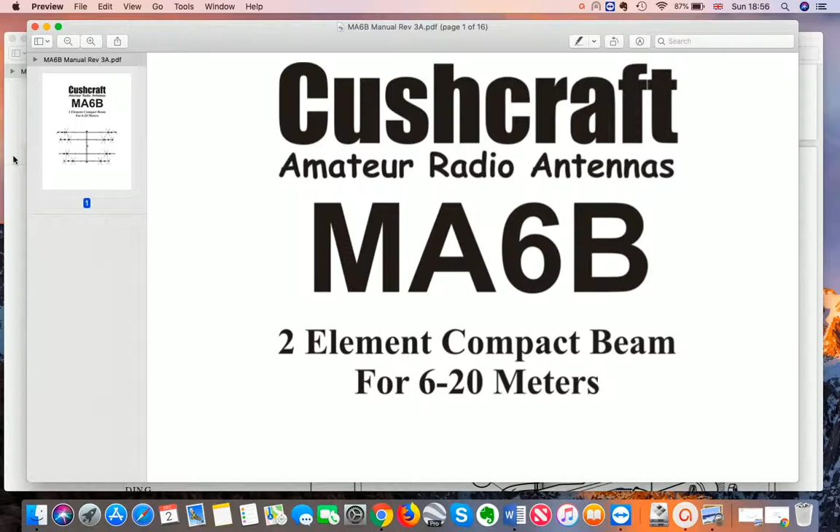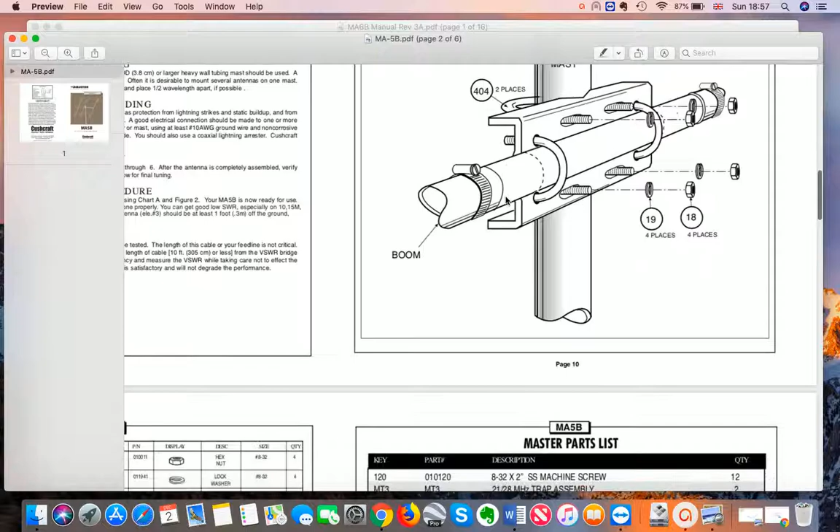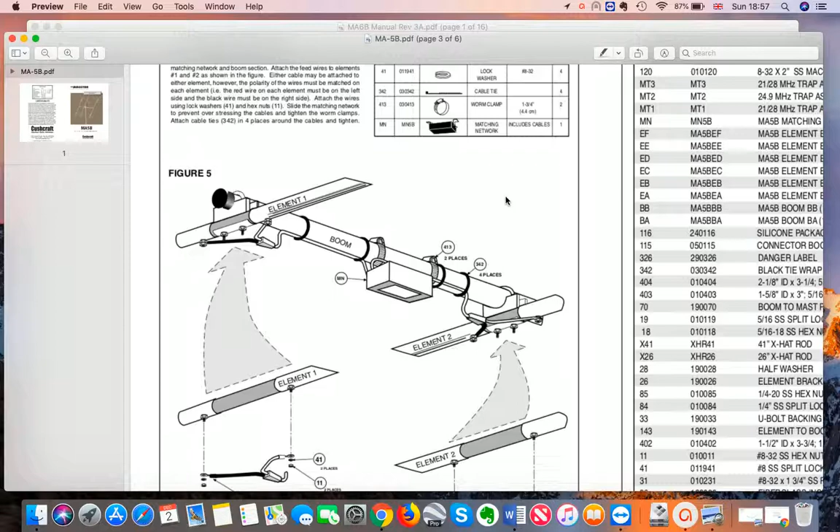First thing I would suggest is that before you start building the MA6B, have a look at the MA5B manual, because it's much better written. As you can see, you get full information with a full diagram on how to fix the mast to the boom. If you've done this kind of thing before, it should be no problem to you, but in my case, it was the first time I'd done it myself, and I was very grateful for these tips. This is also how to fix the elements to the boom, etc. And I personally found it very useful.

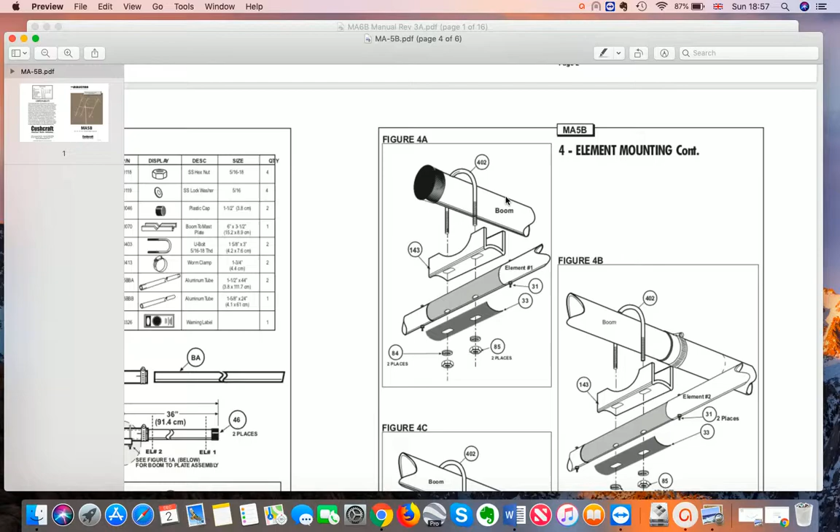For example, here with the element mounting, you see how the parts fit together. And if you have experience, I'm sure this is obvious to you. It wasn't obvious to me, and I was very grateful for this extra information. You will also see when it gets down to the X hat assembly that they also tell you how to affix the X hats to the elements as well, which, as I say, I personally found very useful.

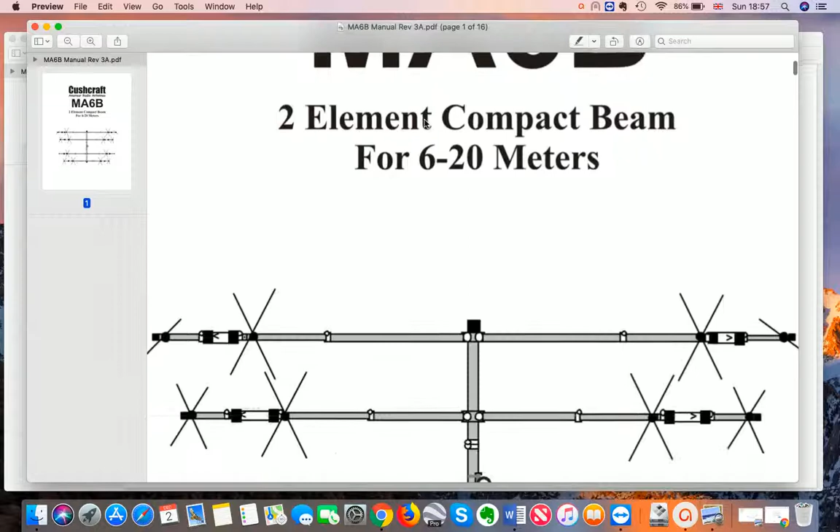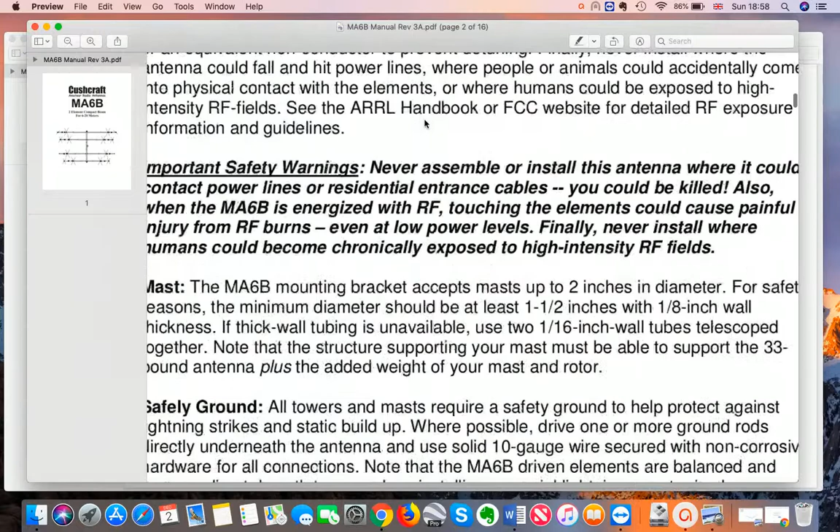To go back to the MA6B manual, you'll find it looks very good there. That's how the antenna is going to look when it's all put together. And you start off with a parts list, which is more or less correct. Just an aside here, we in Britain know worm clamps as hose clamps, and that's just the American expression for them, worm clamps. Maybe people use that in Britain as well. I wasn't familiar with that.

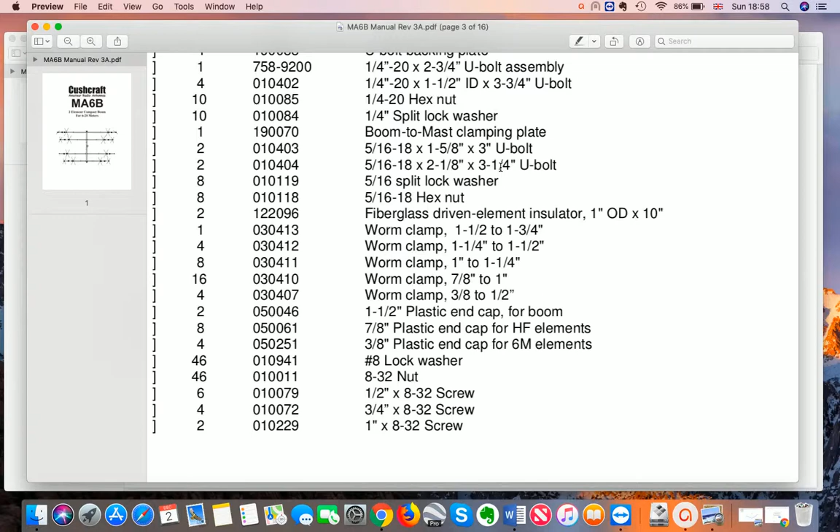And it's a good idea to go through all the parts and find out, make sure everything is there before you start working on it. What I did was, with the tubes, I measured them and put a tape on them with the name of the element or the tube, so that when I was putting them together, I could just go over and pick up the correct one from the instructions.

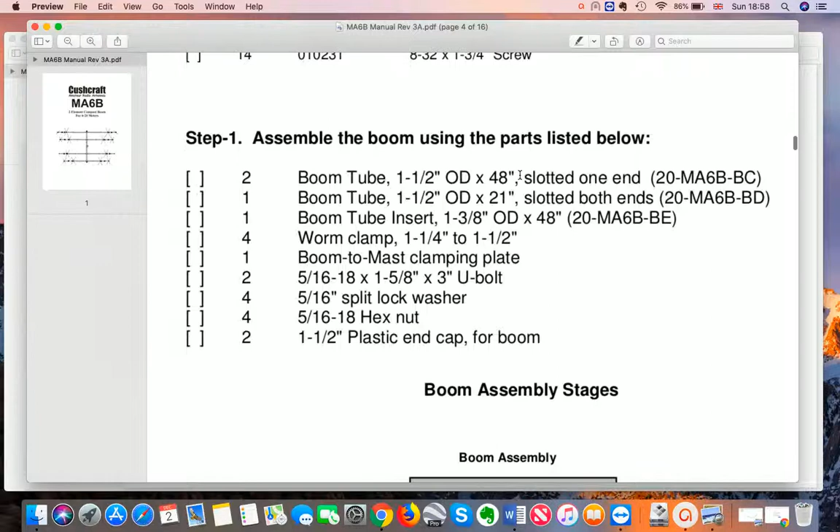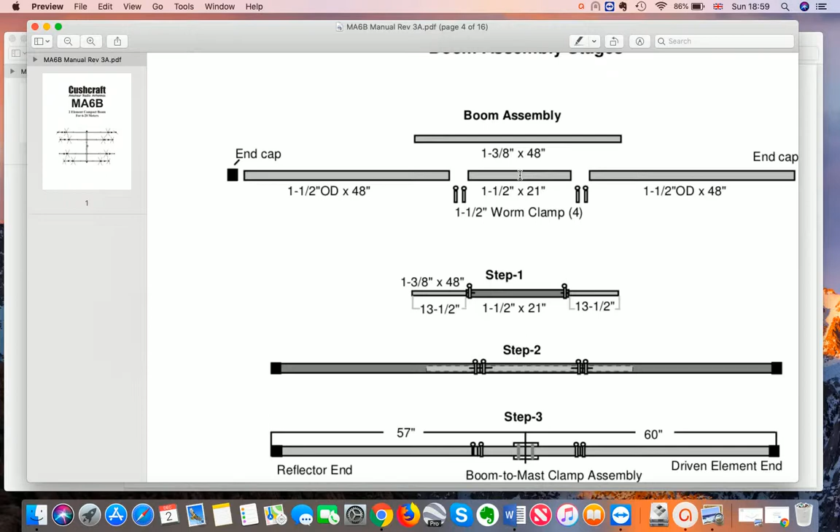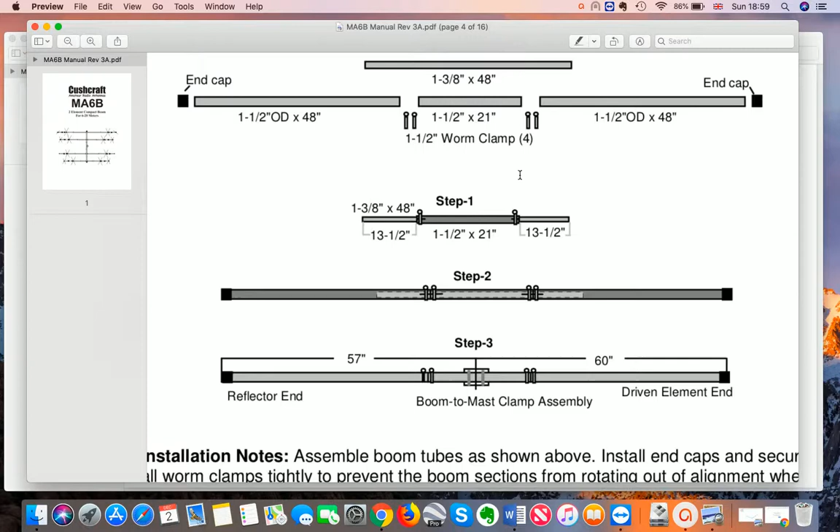As you'll see here, for example, it says the boom assembly, and it tells you 1.5 inch outer diameter times 48 inches, but you don't want to have to measure it every time. So I ended up writing down which particular tube it was for which particular length. I found that useful to me.

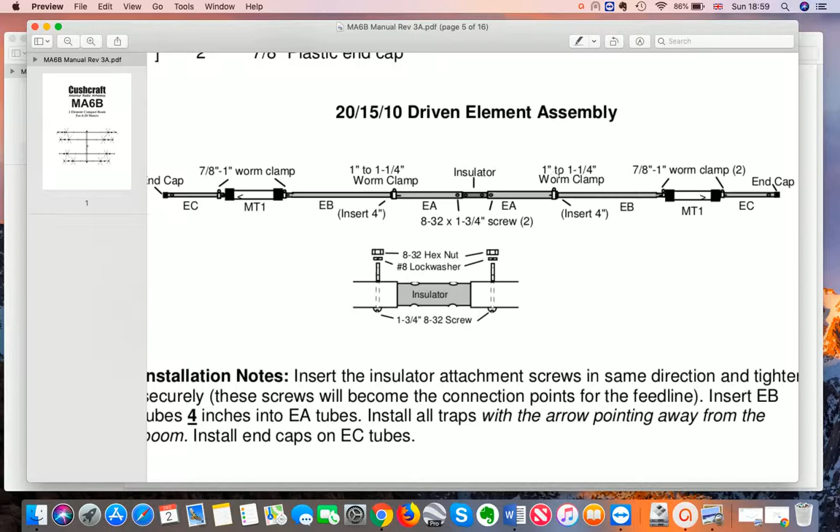So there we go. And here, for example, for the driven element assembly, they do tell you that you put EB into EA, etc., EB into EA on the right side, etc., and then you have the traps there. Anyway, this is so you can follow all this for your construction if you want.

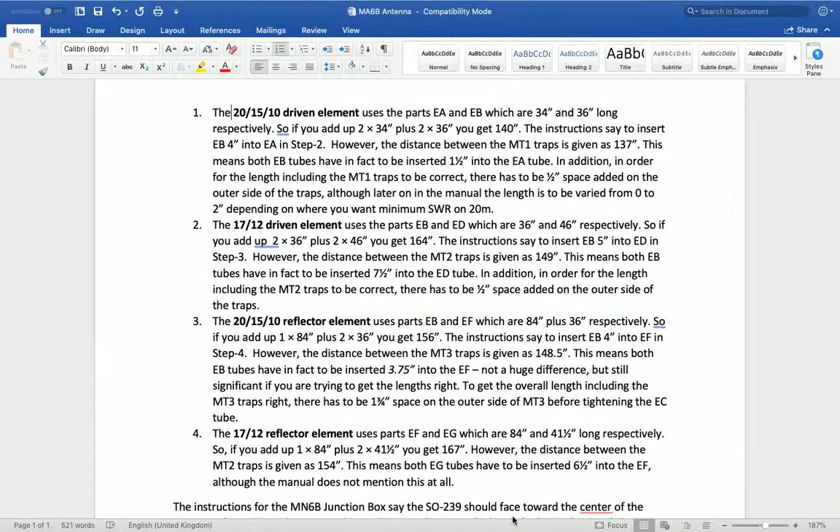Here's something I wrote that I was going to send to MFJ Cushcraft concerning how they have the lengths wrong. I'll just leave it up here. You can obviously stop the video and copy it if you want.

But just to give you an idea, the 20/15/10 driven element uses the parts EA and EB, which are 34 and 36 inches long respectively. So if you add up 2 times 34 inches plus 2 times 36 inches, you get 140 inches. The instructions say to insert EB 4 inches into EA in step 2. However, the distance between the MT1 traps is given as 137 inches. This means both EB tubes have in fact to be inserted 1.5 inches into the EA tube.

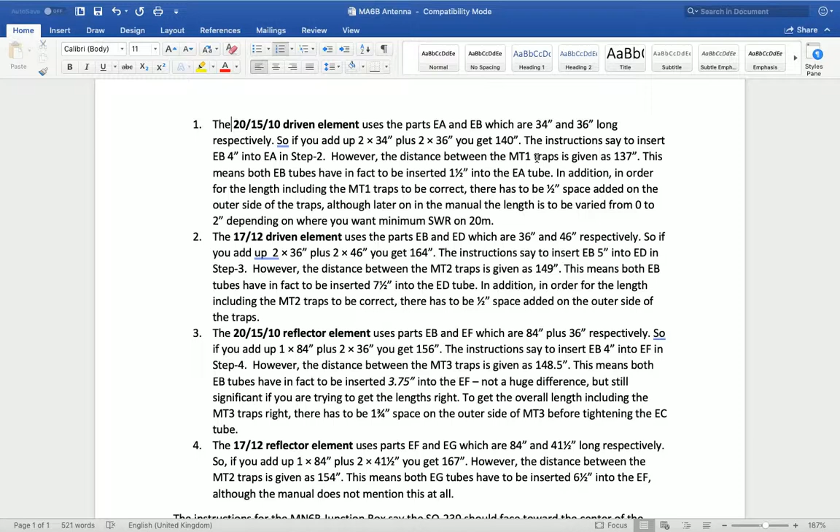In addition, in order for the length including the MT1 traps to be correct, there has to be 1/2 inch space added on the outer side of the traps, although later on in the manual, the length is to be varied from 0 to 2 inches depending on where you want minimum SWR on 20 meters. That's 7 to 9 inches in reality. So there you go. And the same goes for all of the other measurements.

Another thing I noticed was the instructions for the MN6B junction box say the SO239 should face towards the center of the antenna. If you clamp the junction box with worm clamps to the boom, as you have to do, the SO239 is facing forward, so it can only point down in the finished assembly when the antenna is raised. It cannot point towards the center of the antenna.

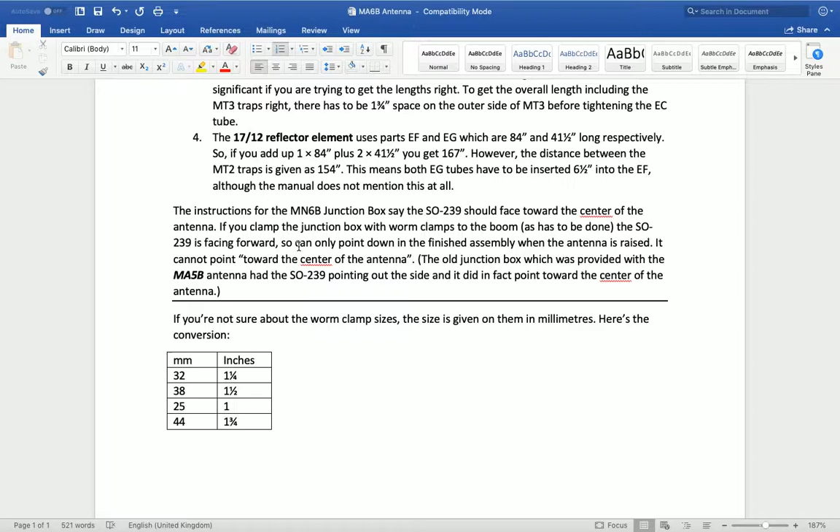The old junction box, which was provided with the MA5B antenna, had the SO239 pointing out the side, and it did in fact point towards the center of the antenna. They have forgotten to change this. And here's another piece of information. If you're not sure about worm clamp sizes, the size is given on them in millimeters. Here's the conversion. So there you go.

That's really everything I wanted to say. I've had the antenna out for a couple of weeks now. I'm very happy with it. I'm going to have to lower it and change some of the lengths a little bit. It's a bit sensitive on 20 meters. It's really not very resonant over a wide range on 20 meters, but the rig and my amp accept it, so that seems to be okay.

So there you go. Hope this has been a help to somebody. I'm Colin, GM4JPZ.